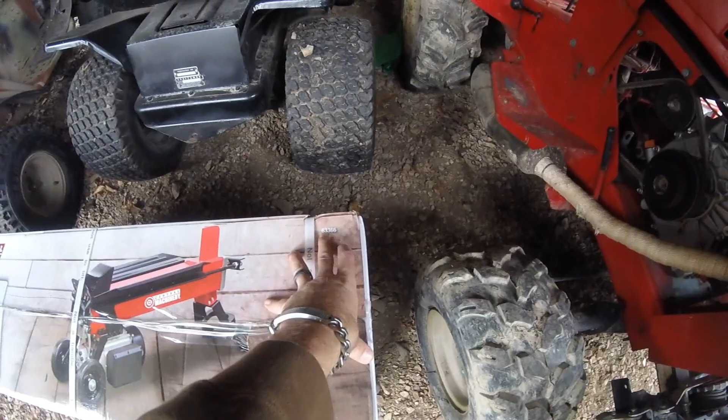Today's video will be an unboxing of the new model 5-ton electric log splitter from Harbor Freight. This is a Central Machinery branded one, the newer brand that's really not too favored. It's the 63366, meaning it's a two-handed operation. The previous model had a switch you could turn on and leave on, a one-handed operation for the lever, with your other hand up here. This newer model has been changed.

But this is the box. I figured I would bring you guys along on the unboxing, the assembly, my overall thoughts, and then I have quite a bit of wood to end up splitting, so I figured I'd bring you along on that too, to see what it's like with this newer model, if they've changed anything. So stick around.

Here's what it looked like on the inside of the electric log splitter box. Comes pretty decently packaged, with an owner's manual that looks like it has a servicing guide. Oh, this is the handle. That's about it there. Kind of bring you down into the box. This is it, looks like it's already fully assembled. So I'm going to lift this sucker up and put it on the table and bring you guys back.

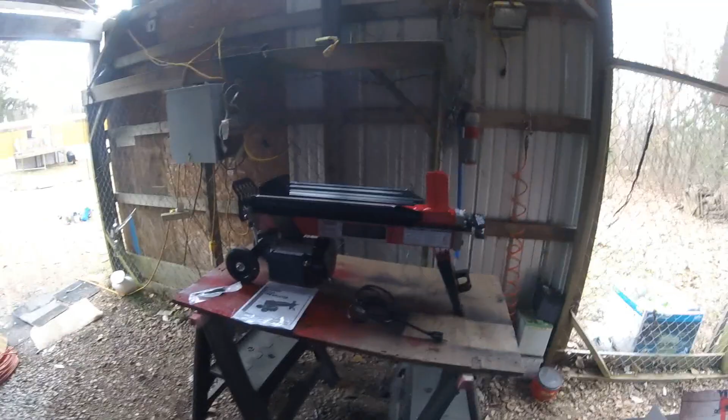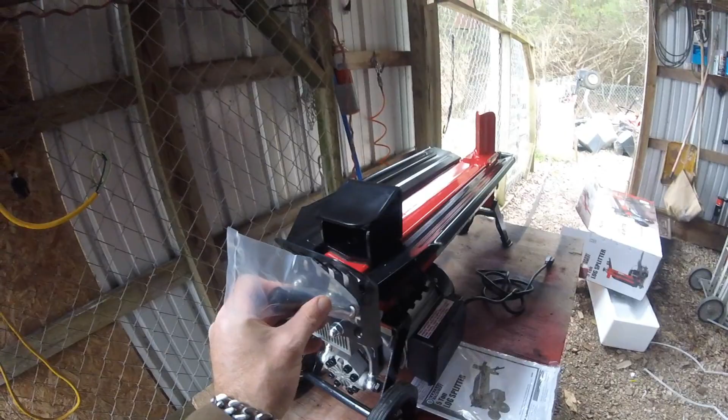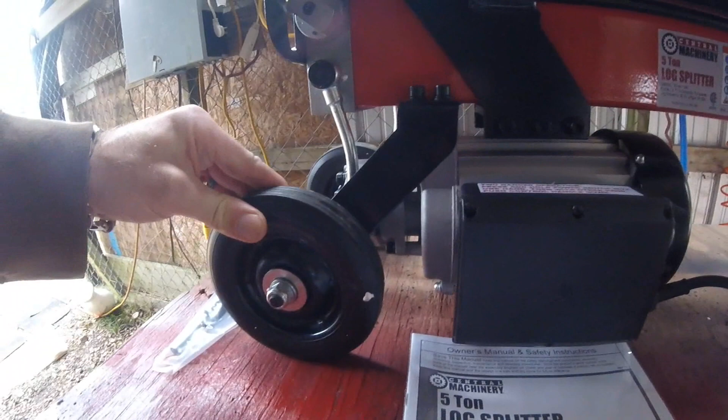Alright, well, here it is in all its glory. I'll bring you around. This is how it comes out of the box. The only assembly required is this handle, it screws right on. Whenever you go to store it upright, like in this position, you'll need to remove this handle. The tires seem to be a little different than the older model.

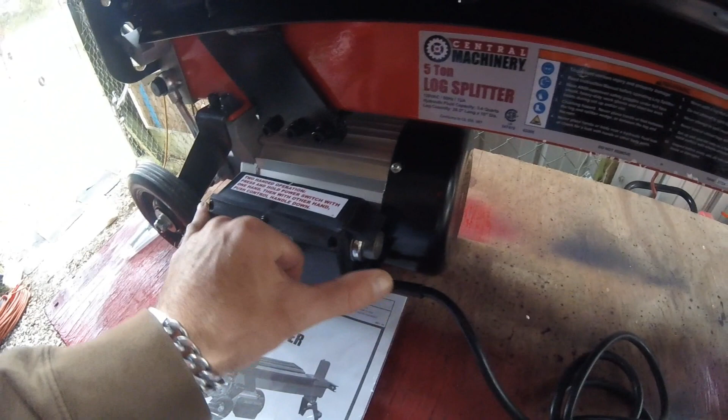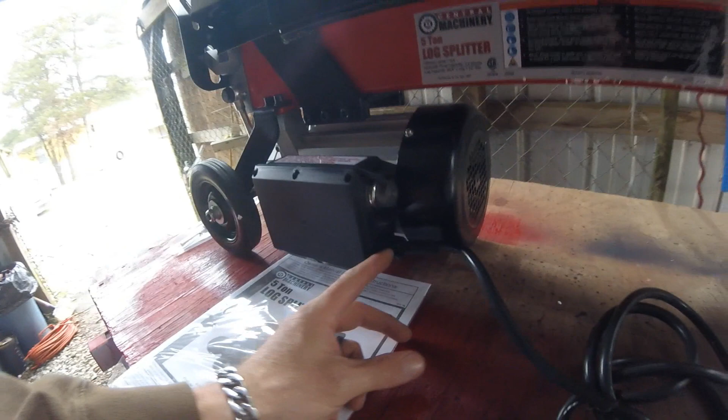It's a two-handed operation, like I said earlier, and they've actually enclosed this around. A lot of people were just putting clamps here, but the waterproof button seems to be a nice touch. The bezel seems tight. I hear this is a weak point, so guys, be careful when you're jacking this thing around. I know it breaks right here really easy, so I'm not sure what I'll do with that.

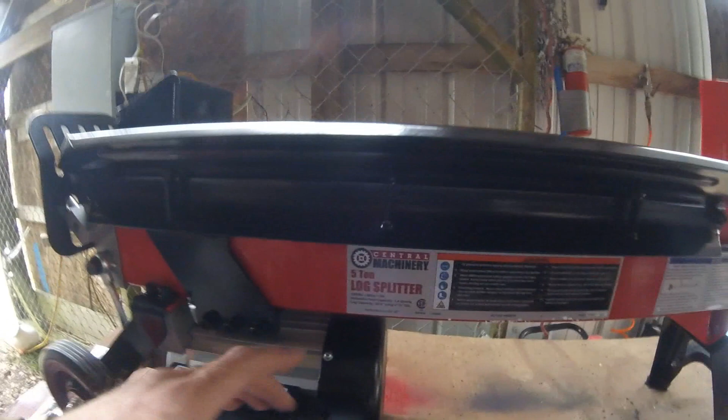Here are the stickers. So here it is. I thought it was a 15 amp model, but it looks like you don't get the 15 amps, so that must be the difference, because I remember the older one-handed operation was a 15 amp model. So hopefully this motor hangs in there.

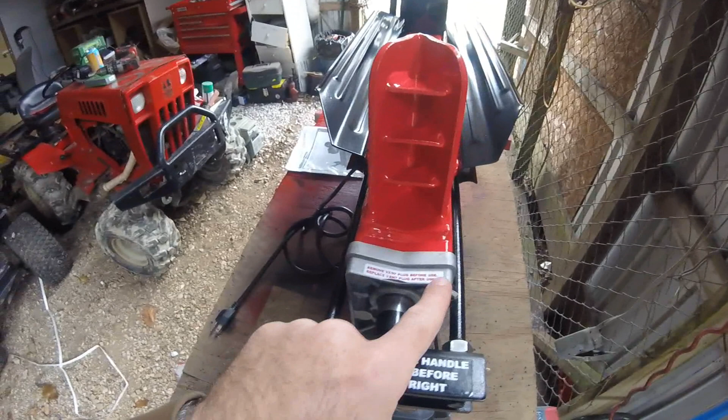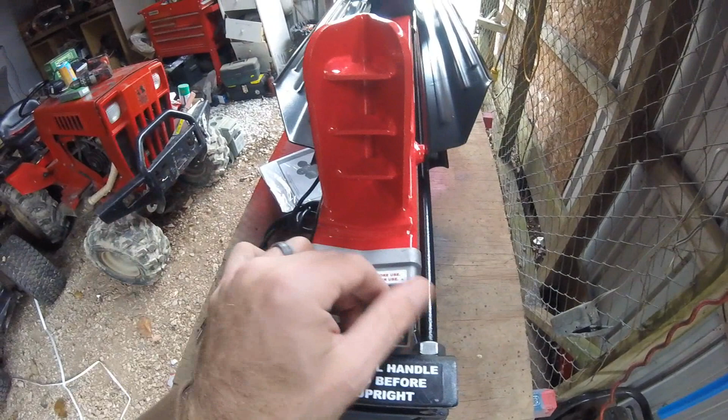Moving around up here to the front, it says you'll need to remove this plug, it's kind of an air vent. Right before you go to split, you'll undo this and allow the cylinder to move forward and backwards. Screw this back up whenever you go to store it. There it is.

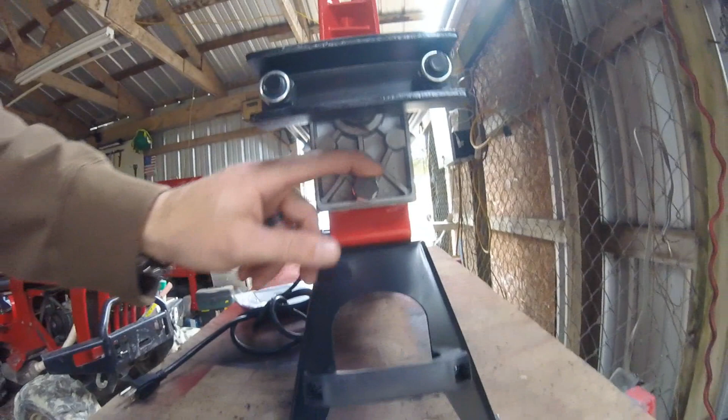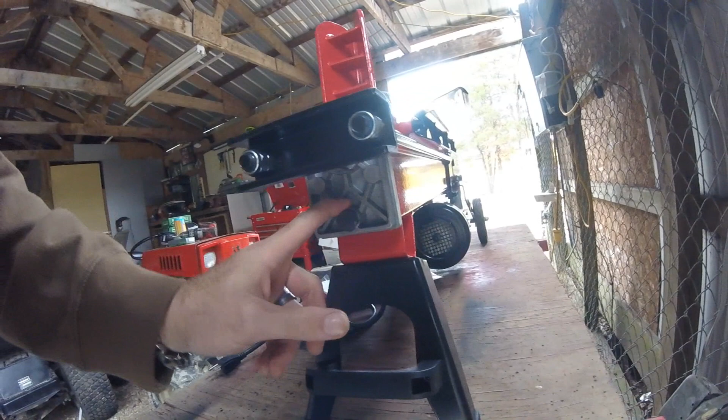I believe this is where you would check your fluid. You'd put it in an upright fashion, pull this out, and I believe the old model had a dipstick like a car. I'm not sure what this one will have, but once this needs to be checked, I'll check it before I start it and let you know. Looks like they do have Loctite on these nuts, so that's a plus.

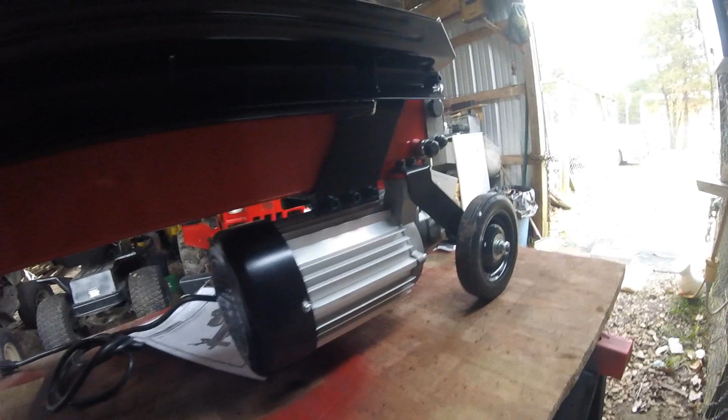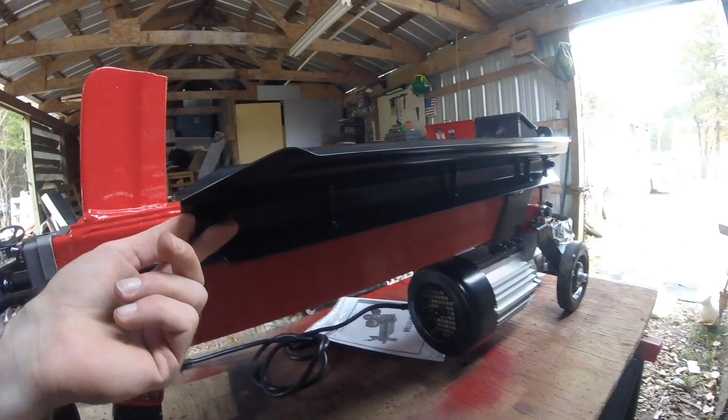Overall, the handle seemed to work pretty well whenever I lifted it up here on the table. It's pretty heavy, but this is pretty much all stuff you can see in the store. For those of you looking at this review, they do have gussets in here, which looks like an addition from the 7-ton, one of the first models they had.

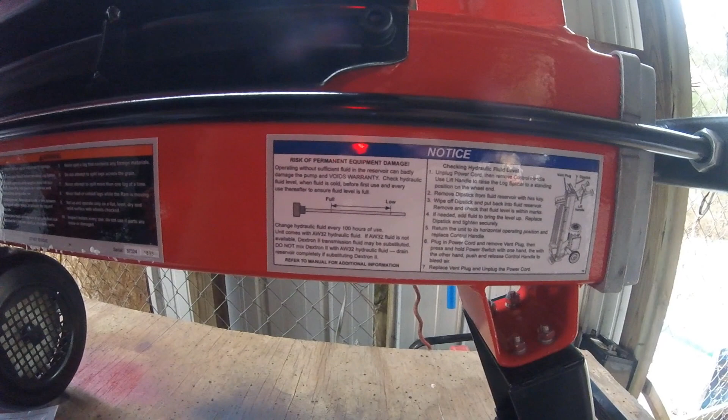But here are some other things. Risk of permanent equipment damage, check hydraulic fluid level. So there we go, looks like it does have a dipstick. And that's how you would store it in an upright position.

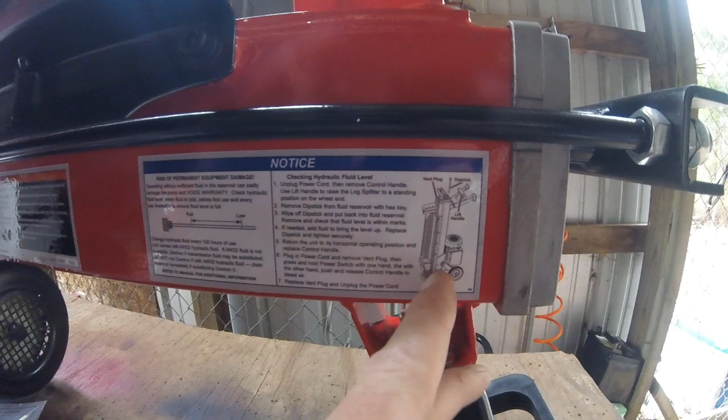If you'd like, I think you can modify this handle even to get it to work in an upright position. I've seen some guys do that, where they flip it upside down and make a little stand, and then they can split with it upright.

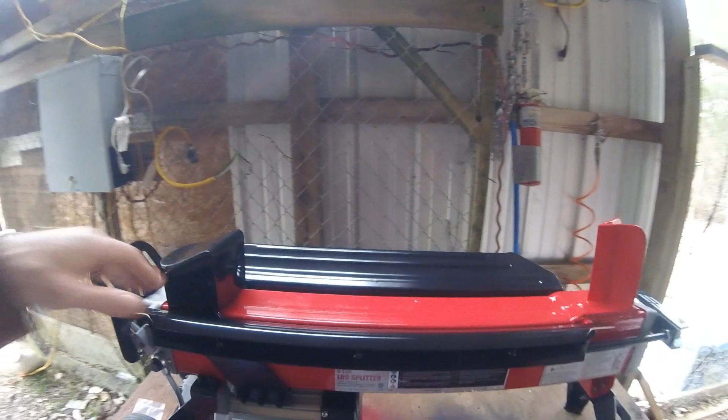So enough rambling, I'm going to try to set this all up. First I need to change the oil in this rig so I can start using it. We'll fire it up, get the trailer, and then we'll move this around.

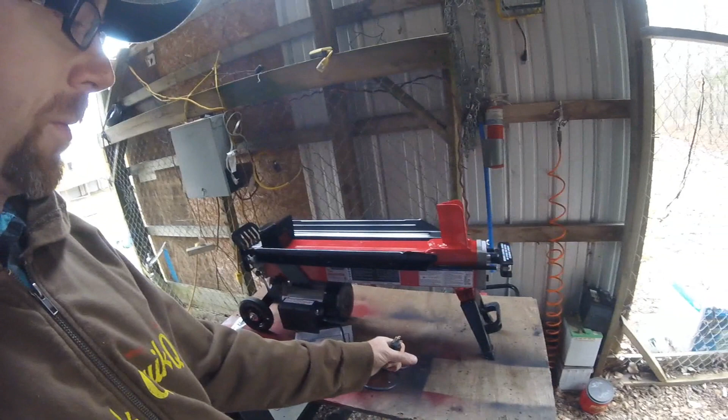It does advise that you use a good power source. You don't want to run a long extension cord that can't really carry the current, because it needs 12 amps, it looks like, at a minimum. I would try to say at least a 15 to 20 amp dedicated plug to run this, so you don't risk burning up your motor. So anyways, I will set this up and bring you along when I go to split. Back to just a quick glance here.

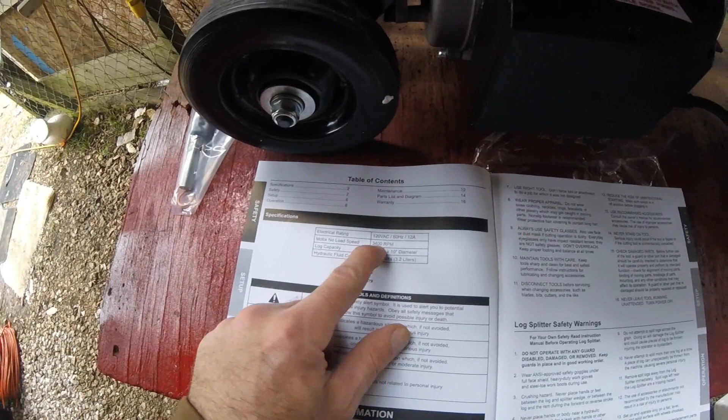So if you look here, it does look like it is the 12 amp model. Looks like some specifications that you might want to know before purchasing this.

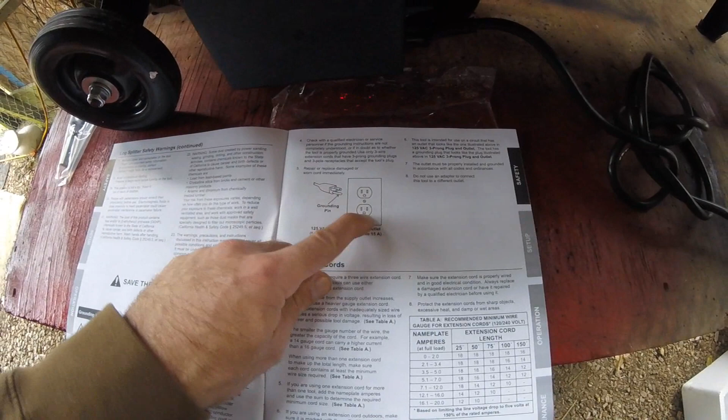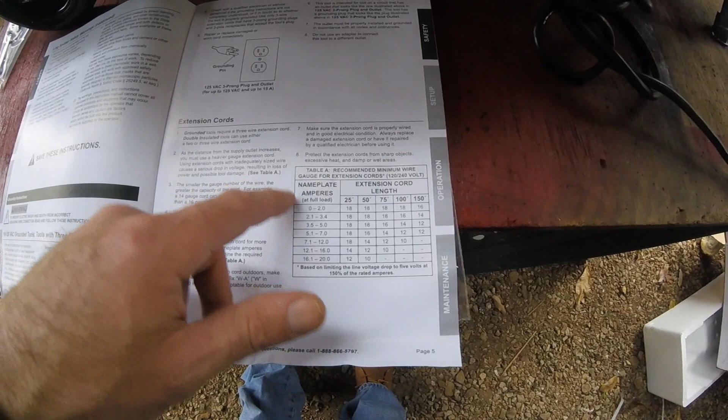Also about the extension cord, it does need to be a grounded outlet. It does say it needs to be a 3-prong outlet. Here's some information about those extension cords. If you plan on splitting far away from where you're going to be at, you can pause the video now, and hopefully this will show up and show you what you should purchase if you're going to be doing things away from a dedicated plug.

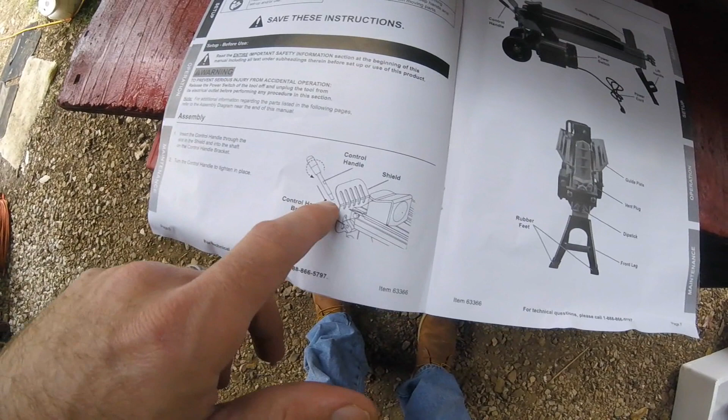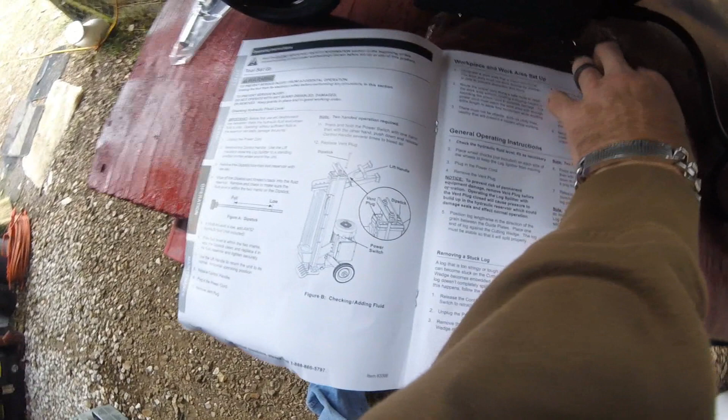Looks like this is the only assembly that's required here. Hopefully I can go through this real quick for you guys in case there's something else. There's a way that you can check the dipstick vent plug.

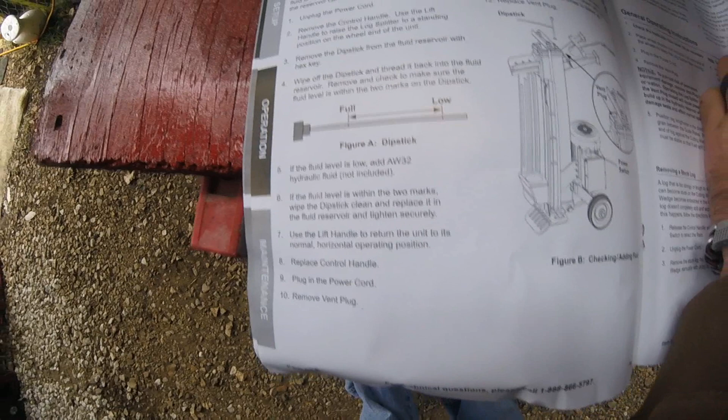Looks like AW32 hydraulic fluid is not included, so I'm glad that I checked that out. I'll need to check to make sure if it's empty or not. And then I'll let you go.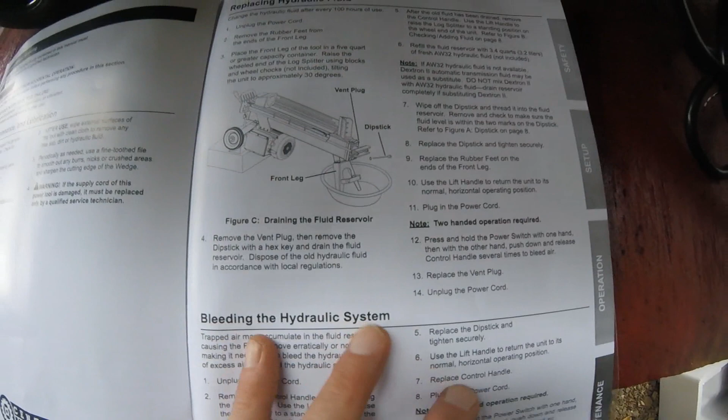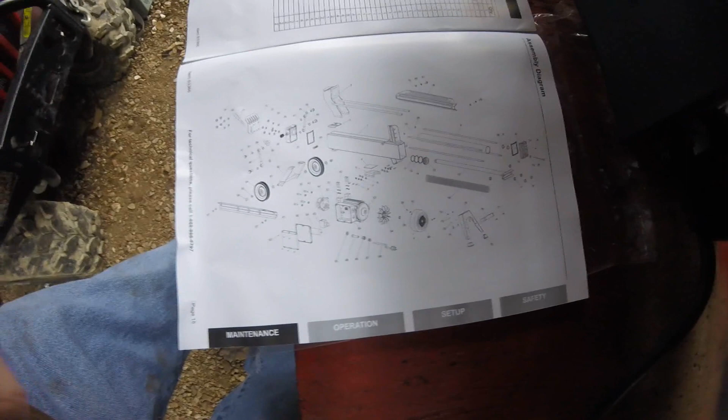Looks like this is how you'd replace the hydraulic fluid. It talks about bleeding the hydraulic system and troubleshooting. There's a parts list, repair parts, and here's the exploded diagram of it. Pretty simple little tool, but I think it comes in pretty handy.

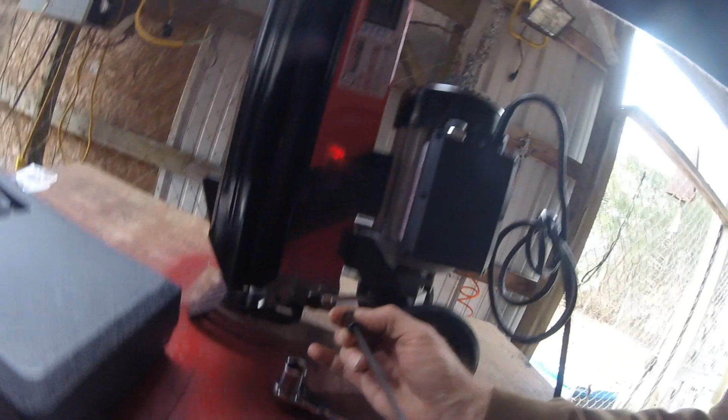So I'll be tilting this thing up and checking the hydraulic fluid, letting you know if it comes with fluid or not. For those of you wanting to know what size this nut is on the top, it is a 3/4. I did pull this off.

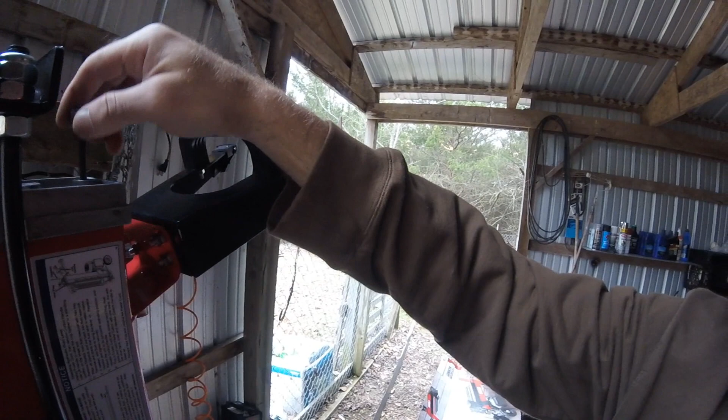We'll test it here. See these two lines? I don't know if you can see it right here at the foot. There's a line here and then a line here. That's where it needs to be at. So I'm going to drop this in and we will see if it comes with fluid or not.

Alright, let's see what it says over here in the light. Looks like it is in between, like the recommendation says. So it looks like it is ready to use from the store.

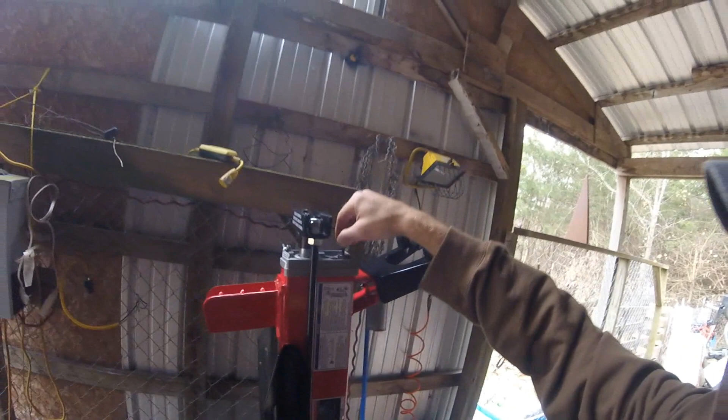Just be careful with these threads. I have seen another reviewer say that this is cast and that the threads were cut really poorly, so I was a little worried about taking this out, but so far mine seems to be screwed in real well and it wasn't leaking in the box. So just remember to keep this little copper washer on there, I think that helps seal it up.

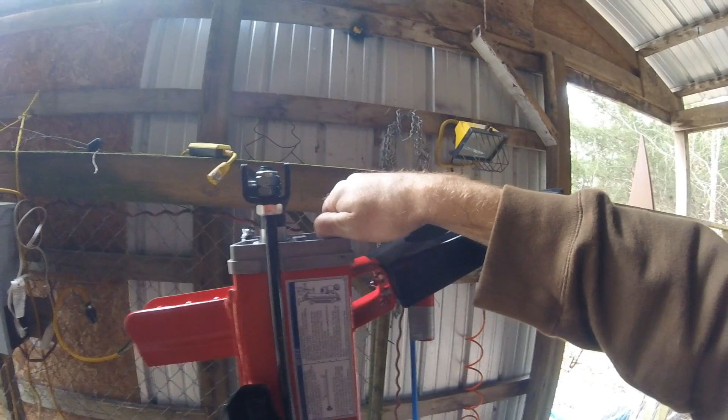So I'll lightly snug this back down, and this is what I was talking about in the upright position. You'd have to modify the stand down here, but then this is where your handle is, so looks like you'll still be able to use it in a smaller handle. So I'm going to tighten this back up and get back on it.

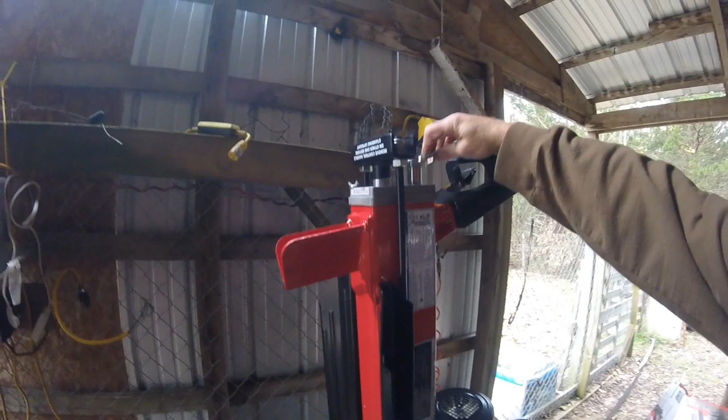Alright, I'm ready for a dry test. So I have a dedicated 20 amp 3-pronged cord running straight to this with hardly any space, 220 running in.

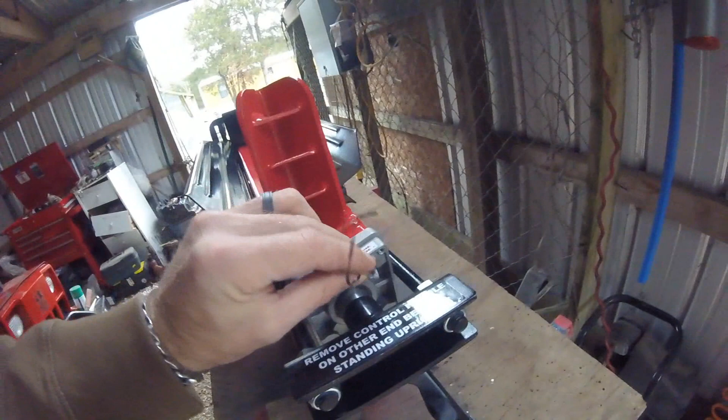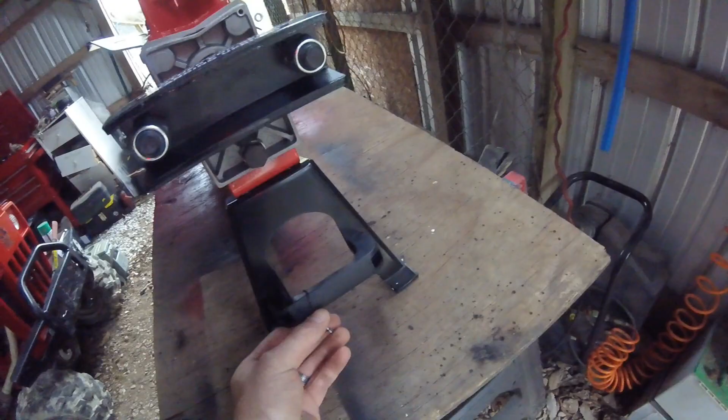I also took this bread tie that's on your little plug up here and saved the little ring on there. Once you unscrew that, I just used the bread tie to kind of hold on to it so I wouldn't lose it. I can put that right there. This is a two-handed operation, so I'll have to set you over here and give you our first little test run of it, see if it actually works.

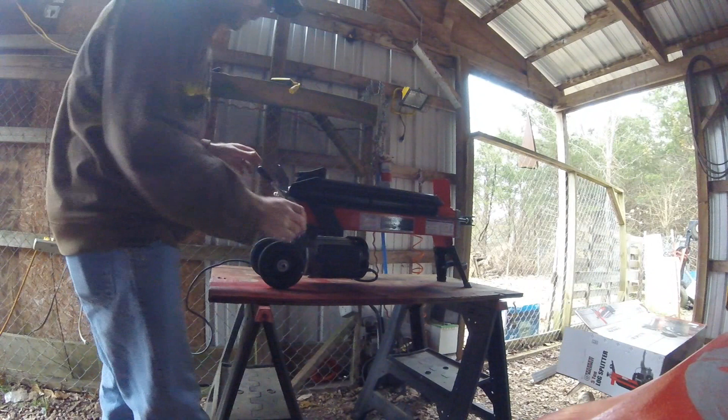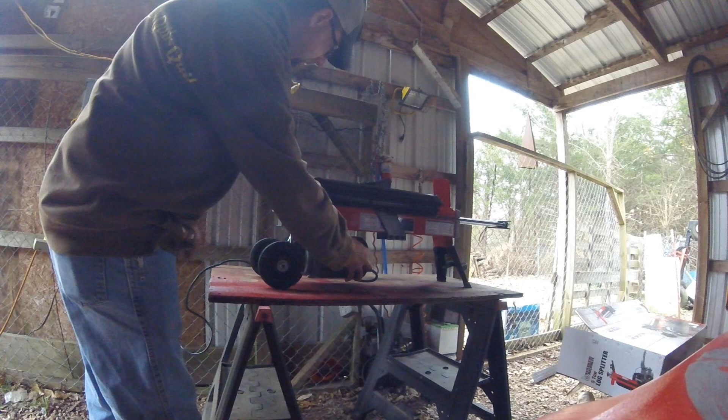There you go. That's full speed. Let go. I thought it was supposed to. Oh, you have to let off. That's fancy.

So for those of you guys thinking about using a clamp, it does look like to retract, you are going to have to actually let off.

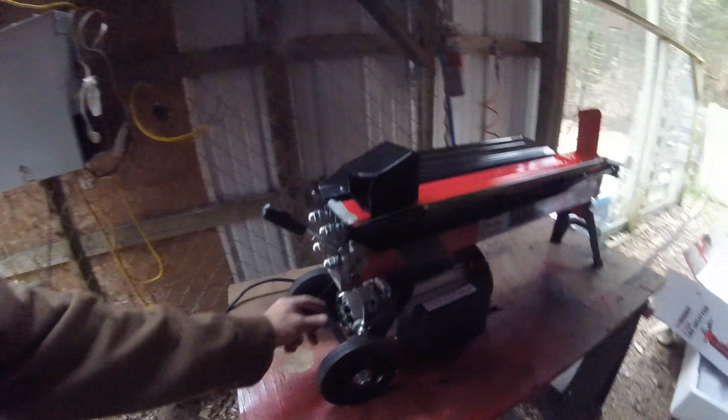Looks like from this newer model, the old model, like the one that was two-handed operation, I had seen some guys have a clamp right here, so it looks like you won't be able to do that on this one until I figure it out. But I'm glad you guys came along. Sorry about the lighting. So far it doesn't seem to be leaking anywhere after that short little run, but it wasn't under pressure.

But I'm going to go and get some wood around the corner here and then just give it a try. So hang tight and we'll test it out.